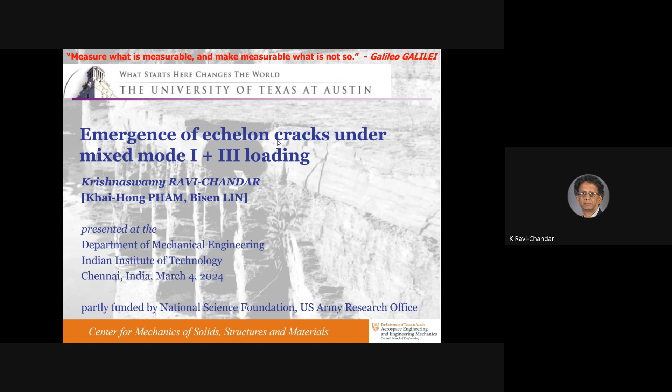The motivating problem for me was something not from engineering, but from geosciences. This is a rock formation in upstate New York State, near Cornell University. It's a huge piece of rock that broke apart, and one side drifted away, and what you're seeing is what is left on the other side. It was an original crack, a parent crack, this smooth surface, a vertical object, which terminated along this line here. Here's a little box for scale, so these are huge objects.

The ground motion is such that this crack is under compression and shear, shearing parallel to the walls of the crack, meaning movement in this direction, and movement into each other giving compression. As a result, from the original crack front, the crack starts to grow into the uncracked portion, but it forms a pattern as it goes, of steps or ridges or echelons. This is the problem of interest: when and how do these cracks form? Can the traditional techniques of fracture mechanics allow us to calculate or predict that this is what should happen?

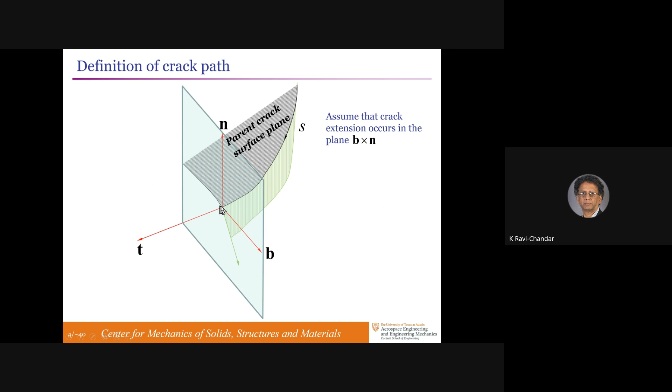So at every point, we subject it to a combination of K1, K2, K3, with a superscript infinity to indicate these are under opening, in-plane shearing, and out-of-plane shearing loading. What is the criterion for growth of these cracks?

Mode 1 is the one that's been considered the most. If you look in the fracture literature, probably 95+% of the papers deal with mode 1 fracture, because that's the commercially important fracture mode that destroys structures and we need to be aware of. So I won't talk about that at all, because it's very well understood.

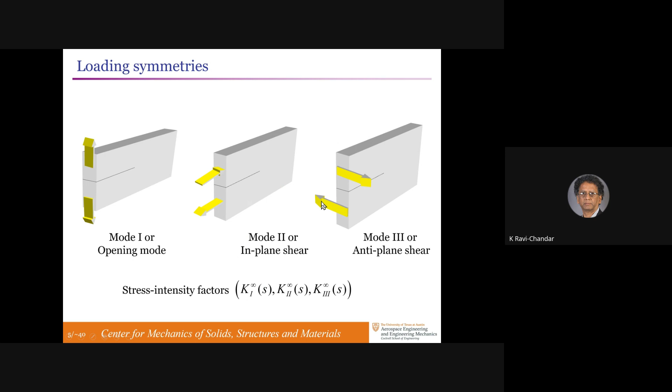So the mode 2 crack in the NB plane looks like this. Here's the parent crack surface, loaded under some combination of K1 and K2 in the far field. The question is, what is the angle at which the crack would grow, and what dictates the load level at which it would grow?

This is obtained using the maximum energy release rate criterion. The crack finds the angle gamma along which the energy released is largest, and therefore it's easiest to crack along there. I'm assuming it's an isotropic material, so fracture toughness doesn't change with orientation.

The maximum of the energy release rate over all angles gamma must equal the fracture energy of the material. You can get an explicit formula for the maximum energy release rate in terms of the stress intensities experienced by the kinked crack, through a calculation demonstrated by Amestoy and Leblond—the local value of the stress intensity factor, local to the kinked crack, in terms of the global values of the stress intensities, as some function of the angle gamma.

So you can do this calculation, find the angle gamma at which maximum energy release occurs, and pose the fracture criteria. There are other possible criteria: maximum hoop stress, which is just a stress calculation—find sigma theta theta as a function of angle; whatever angle theta gives you the maximum, that's the angle in which the crack would grow. The last criterion is the principle of local symmetry.

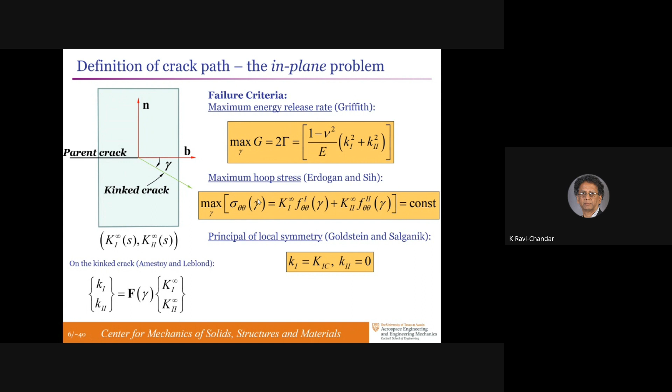Mode 3, on the other hand, is a more interesting, challenging problem. Same picture, I have the parent crack in the NB plane, and I want to know at what angle gamma will it kink. Now the loading is no longer in plane, it's out of plane, mode 3. So the applied load could be K1, K2, K3 super infinity. That means there's a locally perturbed value of K1, K2, K3, which depends on some geometric factor that depends on the angle gamma.

Now, the question that is yet to be answered satisfactorily is what's the extension of the principle of local symmetry for 3D problems, that the crack will find the path along which there's maximum tension or minimum shear. People have interpreted this as saying K2 equal to 0 - local mode 2 is 0, but nothing about mode 3, local mode 3. But the mode 3 contributes to energy release calculation. So the same criterion, mode 2 stress intensity is 0, the remaining energy release rate must be equal to the fracture toughness of the material, and that should give you the criterion for the angle gamma.

But it turns out that if you do this calculation, it says gamma C should be 0, that the crack must grow straight along the B direction. And that's not satisfactory for two reasons. One, it doesn't make intuitive sense that you shear something and it goes along the shear plane when the material is weak in tension. And two, experimental observations contradict it - the crack never grows along gamma equal to 0.

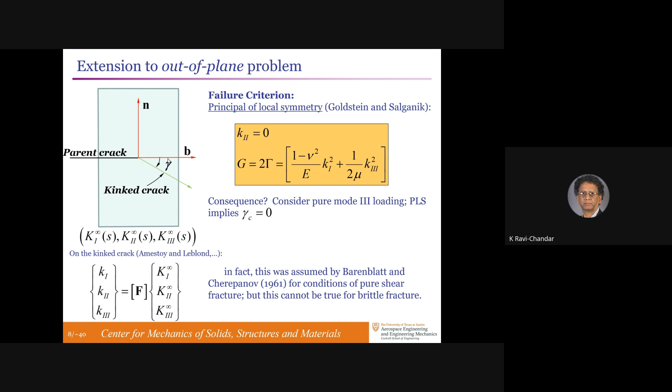In fact, Sommer and Knauss did experiments some 50 years ago. Knauss did a pure mode 3 experiment - you cut a crack into a long, thin sheet and shear it, just like the picture of the rock formation that I showed in the very beginning. The crack is under mode 3 completely, and it spawns daughter cracks. Instead of the parent crack moving continuously out, it pops out - it's independent fractures nucleated at some separation, yet to be determined what controls that.

So basically, this is what happens. The parent crack is shaded gray. The daughter cracks that spawn out from that are those angled Pac-Man shaped objects.

Sommer did an even more interesting experiment. It was a very dominantly mode 1 experiment with an internal crack under pressure in a cylinder - a cylindrical specimen with an internal crack with pressure in there. It grows radially out, but then he superposed a torque on it. That gives you the mode 3 along the crack front of uniform mode 3. And he found that when the mode 3 value reached a critical threshold, daughter cracks spawned out, and you had tilted cracks, or the echelons forming along the entire crack face.

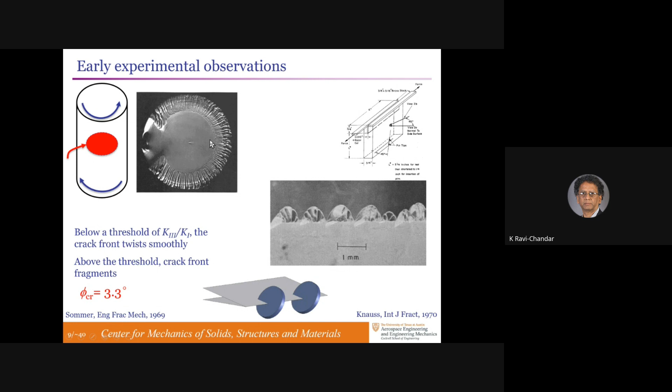So people started thinking about this. What is going on in mode 3? A lot of analysis was based on linear stability analysis. You take a straight crack, perturb it with a sinusoidal oscillation or a helicoidal oscillation, and see if the amplitude of the helicoid or the sinusoid would increase or decrease.

They found a criterion that if the global values of K1 were given, you could calculate the local values of K1, K2, K3, and put this into the energy release criterion to see if the amplitude of the perturbation would grow or decrease. We found a critical transition point that depended on the Poisson's ratio of the material. A bit suspect, but it's okay.

We did some experiments about 15 years ago and found that the instability set in with a different material, different Poisson's ratio, essentially when K3 was negligibly small. So something is not right about this criterion. So we need a new criterion.

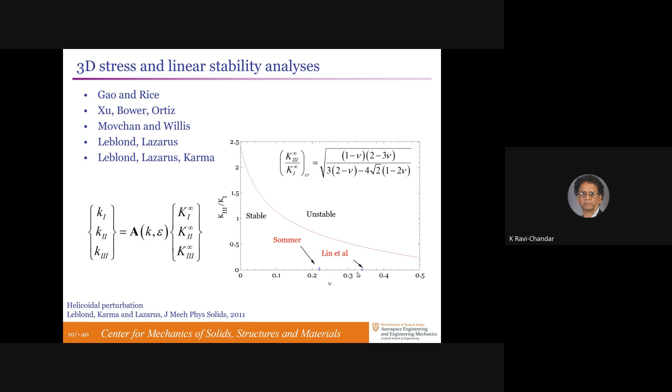So we said, let's do some experiments. The theory doesn't give you the answer. You need to go to experiments to see what else is missing. So we did a number of experiments. The first one was to see, is there a threshold? Never mind what the value is, but is there a threshold at which these things pop up?

So we designed a specimen, a glass specimen, rectangular in shape, under 3-point bending, but with a crack slanted at a particular angle, and the crack doesn't penetrate all the way through. It's a 3-dimensionally shaped crack. You can see it penetrates the surface on the back side there, it's a circular arc and penetrates again over here, on the opposite face.

This was to get different mixities of K3 to K1 on the two sides. And we were able to calculate the stress intensity factor very precisely for the 3-dimensional problem using a boundary integral technique.

The idea was the following: if you slice it in that plane and show the cracked object, this is the cracked part, that's the crack front, and this is all uncracked. It's under a combination of mode 1, 2, and 3.

Can you see those lines? Just barely. Mode 1 is about that line. This point corresponds to that little box here. At this location, the mode 1 stress intensity factor is the largest, so you'd expect the crack to start there. On the far side, it won't, because the mode 1 stress intensity will be compressive, so it won't start there.

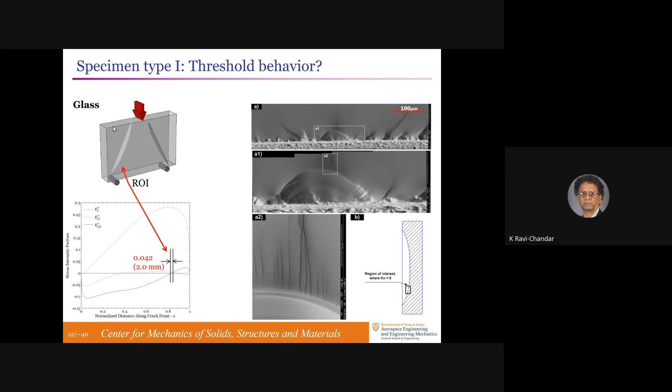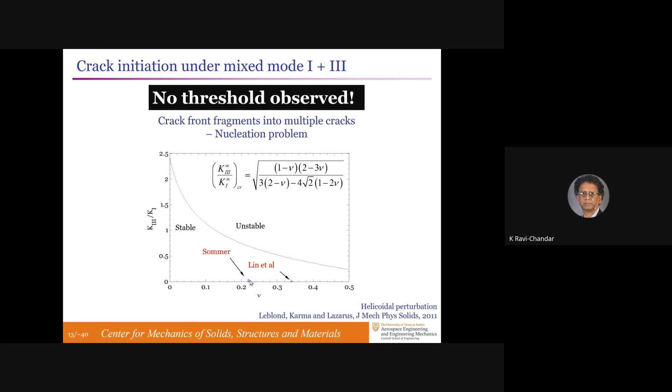So there's no threshold. This is where our results sit, and we have some results over here as well. As soon as you apply a small magnitude of mode 3, the crack starts to flip. So we need a new criterion.

So here's the leap of faith. We made a different extension of the principle of local symmetry. Instead of insisting that only the mode 2 stress intensity on the tilted crack is zero, you say the crack is not capable of shearing at all.

So on the new crack surface, you should have the mode 2 and mode 3 stress intensity factors all equal to zero, and you only have a mode 1 stress intensity factor that must reach the fracture energy toughness of the material. This is very easy to impose. The angle at which the crack would tilt based on this is calculated by this simple formula for plane strain.

That means the crack should do that. The parent crack is in gray. The daughter crack will be the shaded orange color. But this is a criterion that's not possible to impose locally everywhere.

It doesn't have translational invariance. If I move to the right, it'll violate it. So basically what it's saying is if I move to the left of this point, the crack should go up. If I move to the right of that point, the crack should go down, from the perspective of the B vector.

But if I now move a little bit to the right or left, I can't enforce the same thing unless the crack fragments itself, which means it can fragment further. And there's no clear criterion for what sets the spacing for this fragmentation to occur.

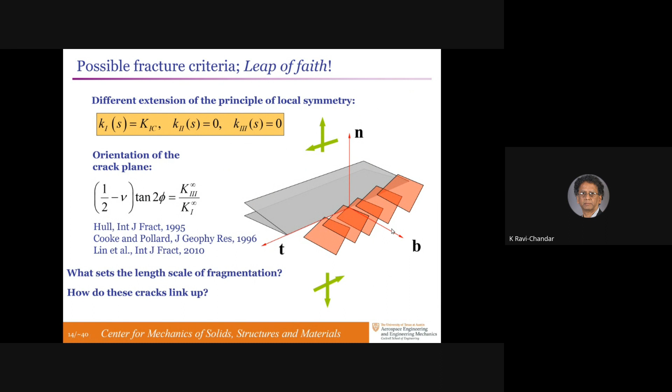First, about how the daughter cracks could link up. If you look from the negative B direction at a slice in the NT plane, you'll see these cracks. They're separated from each other, but the ligament between them is not broken. So you just have these cracks popping up that are disconnected from each other, connected only at the back of the parent crack, with no continuous path to a fracture surface.

Eventually, when these so-called A type cracks slanting to this side start moving, this ligament between them, depending on how wide they are, creates local tension, and they may do a handshake like this. This crack curves and comes and meets this one; this crack curves and comes and meets this one. If they're close enough together, that's how they meet up.

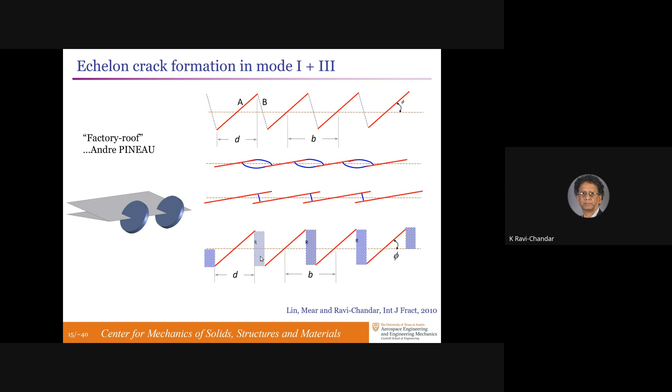In some cases, they just break as a brittle crack perpendicular to the parent, to the daughter cracks. For us, all we need to know is that when these parent cracks spawn daughter cracks, they're not connected, and there's some energy stored in this region that needs to be accounted for if you're trying to look for a criterion for crack growth, where only partial crack growth is observed.

So we redesigned the specimen to have stable crack growth over multiple distances in order to see how these cracks interact with each other. We took the same specimen and inverted the three-point bend configuration. Now these cracks are under predominant compression and shear.

The compression will prevent the cracks from running away, while the shear will make them grow. So we could have cracks that pop and stop at some point, allowing us to look at the geometry of that. I'm only going to show you pictures of what the eventual outcome is.

The parent crack is in the background. This is the width of the parent crack. These were cut with a saw, so they have a certain dimension to them, on the order of 200 microns or so. They pop these daughter cracks—these are the daughter cracks.

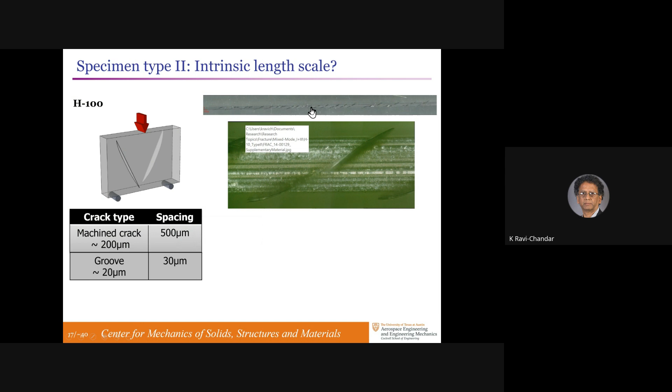So it's whatever the length scale of the crack front is that dictates the spacing, because it's an elastic unloading over some length when the first crack pops. There's no intrinsic length scale—the scale is governed by the scale of whatever defect triggers these daughter cracks.

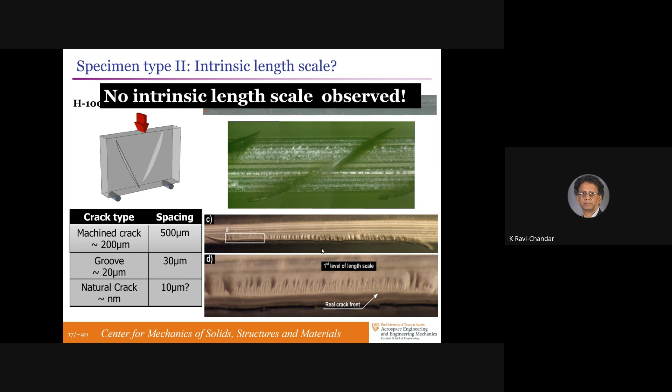The next thing that happens is that the daughter cracks grow, but they shield one another from growing, and they lead to what is called coarsening.

Goldstein did some experiments in the 2000s, I think, where he took a specimen, which is where we got our designs for the threshold determination. There are cracks on two sides, asymmetric, either tilted or straight, under 3-point bending. So they have this mode 1+3 loading, and they spawn daughter cracks.

Here's this cartoon of what the daughter cracks look like. The background parent crack is along that line. The daughter cracks are tilted, and there's a spacing between them.

He did these experiments in Gruyere cheese so that it's easier to slice them and see what the daughter crack geometry looks like. At state A, when the cracks had just started from the parent crack, there was a spacing of those cracks that you can see here.

When you allow them to grow by a factor of 10, I think, in length, you see the same thing: the number of daughter cracks is smaller and the distance is greater. So these cracks that started don't make it all the way through as you progress.

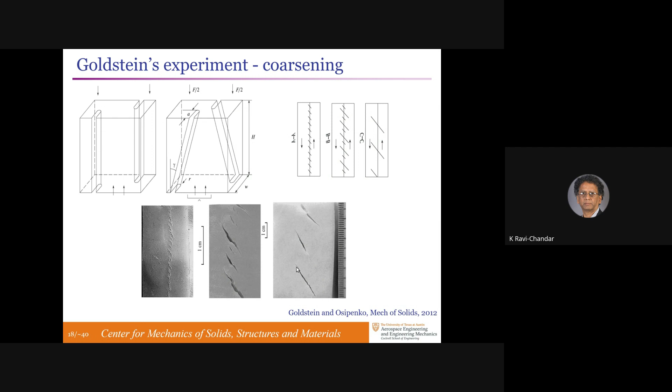We found the same thing in our experiments in a different material—this is now a brittle polyester. Those are the daughter cracks. The parent crack is over here.

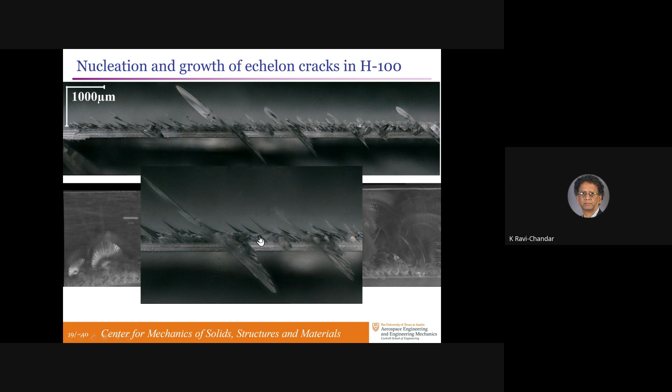They're tilted at an angle of 45 degrees for the mode 3 loading, and you can see many families of daughter cracks. That's the third family, that's the second family, there's the first family that's even smaller. So there's a coarsening effect of these cracks as they grow.

It's easy to understand the coarsening with a very simple simulation. Suppose there's a system of daughter cracks, periodically spaced, subjected to a mode 1+3 loading in the far field. They create a stress intensity along the curved crack front that allows them to grow.

That stress intensity factor, mode 1, is given by these lines. Ignore these two from the endpoints, which have edge effects we didn't take care of. If you suddenly allow one of these cracks to expand and redo the calculation, all of the cracks experience nearly the same stress intensity when they're uniform.

If one takes a burst and moves forward, that stress intensity is shown by the red line—it increases. The two nearest neighbors decrease their stress intensity factors because they're shielded. The next nearest neighbor, this one and that one, don't see any effect. They don't get shielded. So there's a clear period-doubling kind of instability here.

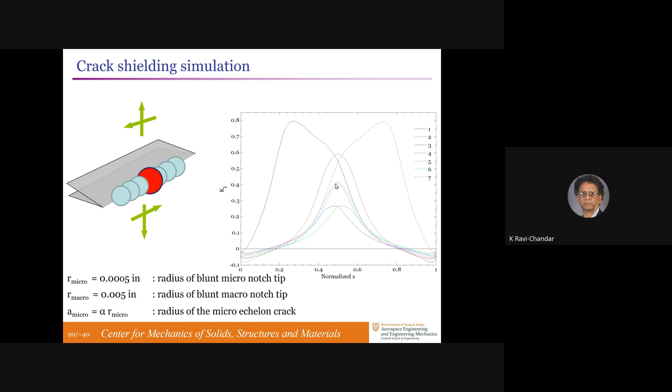If by any accident one crack pops, it will shield the nearest neighbors, and the next nearest neighbor can grow. Take that to its conclusion and it'll always period double, and every second crack will stop—that's what's going on here. Fairly easy to understand.

Finally, how do they link up and grow? For this, we have to create another experiment. This was done on a hydrogel, gelatin-based, the dessert that you make. We made specimens out of gelatin and put them in mixed mode loading by pulling it in uniaxial tension, but put a sharp angled crack, part-through crack at an angle, and observed what happens.

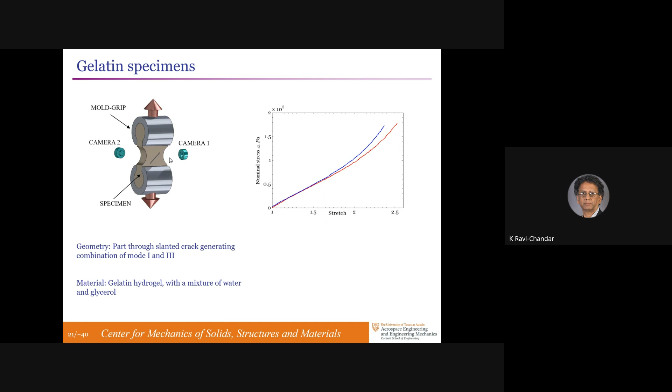This is a crack that was scribed into it and then applied mode 1+3. It created daughter cracks, and we've already established that daughter crack system. We continue to load it to see the further progression of these cracks—how they basically link up and join.

So the crack is at a slant to the geometry of the loading, but we're looking at it at a projection.

So you could see the daughter cracks starting to grow. And if you pay attention to some of them, they'll fall off. The other ones keep going. We'll play it again. So somewhere here, you'll be able to see the...

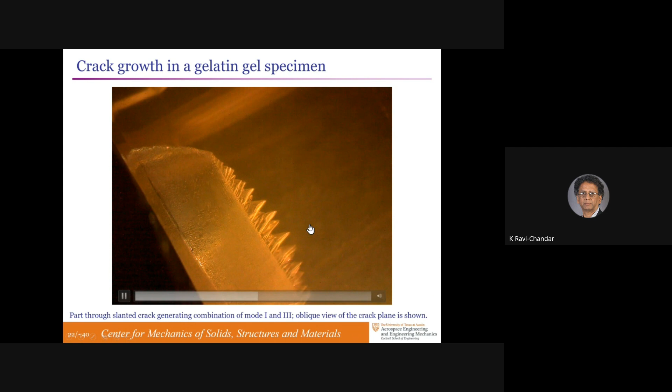This crack will fall off. It slows down, and there are others that slow down too. But these are unconnected cracks. They're all at a slanted angle, and they keep going. Some of them drop off, but the other ones keep going unconnected. And eventually, something connects them up from the back.

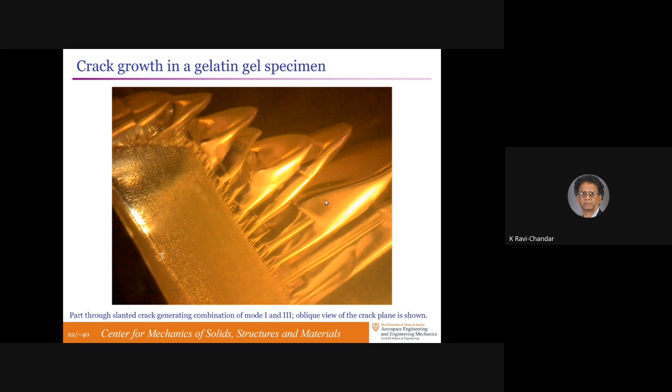And you're not able to see that here, so I have to show you a cartoon of what I think is going on. So that's the parent crack. It spawns daughter cracks. The daughter cracks grow. They shield, and some of them grow more than the others.

But now what happens is you're still subjecting them to this load, but the parent cracks will experience a larger mode 1 loading because otherwise there's no further deformation possible. The parent cracks lock them in and they would stop it. So they would advance and the entire system will keep moving to a steady state. And this is how the pattern survives the coarsening and eventually.

Yeah, right. It has a jet lag, or you? It has a lag. I don't know if it's a jet lag.

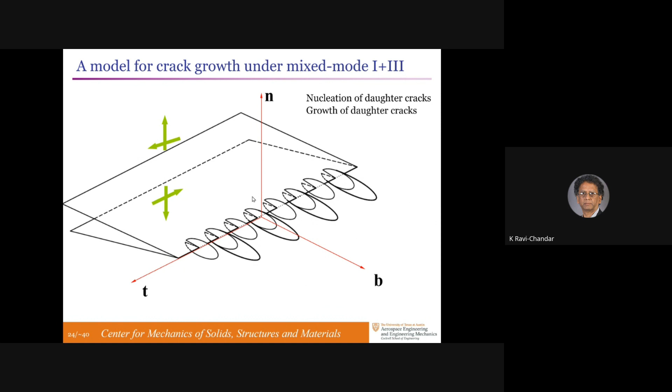So we think that it's trying to establish a steady state by this coarsening process and cutting off from the back. And then you could see that this progression could sever a large surface into two pieces. So that's what's going on here.

Now you can see there's a spacing of the daughter cracks, and they're all tilted. You can't see that from this picture, but each one is a tilted crack at an angle. And as they grow forward from the main parent crack, some of them get dropped off, and there's a coarsening, and you can see that at this point, one of the cracks, these two merge and become one crack. These three have merged and become one crack, and so on. So the shielding is non-uniform because the material is non-homogeneous and there are local defects.

So that's what we think is going on. So the question is, can you now simulate this thing? And we're going to do phase field methods to see how we can simulate this.

I'm not going to spend too much time on this phase field method, just give an outline of it. So the idea behind the phase field method is to write the Lagrangian for the system, consisting of kinetic and potential energies, and include in it the fracture energy to enforce Griffith. The idea is that this is over the set of points that form the crack, and that is what makes it difficult to handle. You cannot do this for arbitrarily unspecified crack path. The Euler-Lagrange equations, I don't even know what they would look like to write.

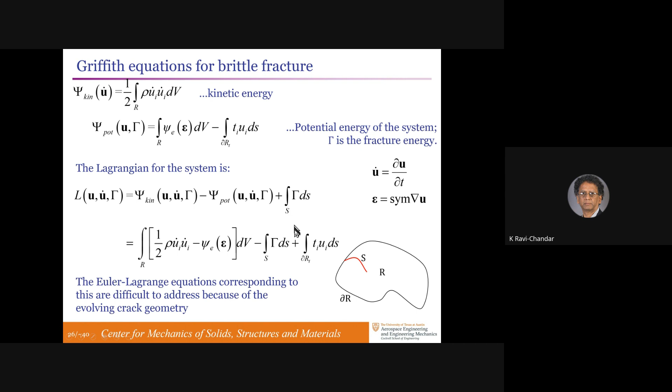But the idea behind the phase field approximation is threefold. First, the surface integral here is approximated by a volume integral. So instead of the integral of the fracture energy over the fracture surface, you do the integral of the fracture energy over a spread out smeared volume, where the volume is dictated by some intrinsic scale of length L naught to be decided, and you introduce a parameter C, which will degrade this material from intact to a damaged material over some magnitude of the loading history, depending on what kind of formulation you do for the fracture energy penalty.

This brings in intrinsic length scale dependence, so they've introduced a gradient penalty term to penalize sharp gradients. And finally, to model the loss of material stiffness, you degrade the strain energy in the material based on some assumption on how the damage progresses as well.

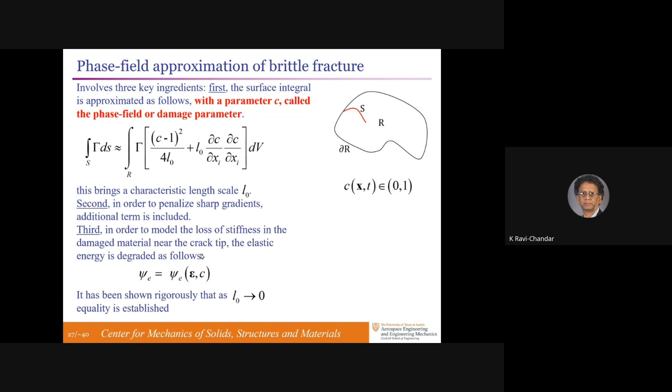Now, there are proofs that this will converge to Griffith fracture if the length scale L naught tends to zero, and there are fix-ups for fixing the fracture energy when L naught is not zero. I won't go through all of that, but the basic idea is you've replaced that surface integral by this volume integral term, and now you can write the Euler-Lagrange equations for this easily. And this is the divergence of the stress equal to the inertial term, where we have defined this thing as a new stress, damage-induced stress.

Psi e depends not just on the strain, but also on the damage parameter C.

So you get two equations: one for equilibrium of the mechanical forces, and the other for the evolution of the phase field parameter.

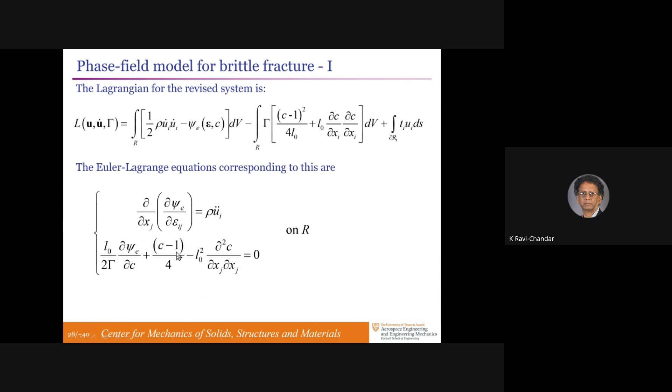I'm not going to go through this in detail because I'm jet lagged, but the details are a little tricky. The basic idea is you take this strain energy to be the undamaged strain energy multiplied by some function of the damage parameter C, and that gives you the damaged elastic property as well as the evolution of the damage function itself.

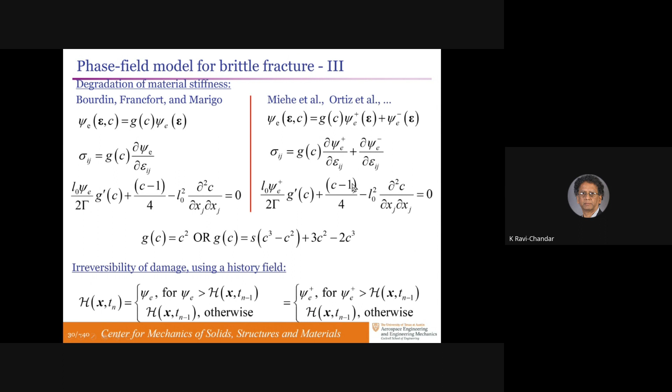You can do the one-dimensional problem fairly easily, I'm skipping details again. Basically, depending on what your damage function is, the local stress-strain behavior with the phase field is linear up to some point, starts damaging, reaches peak stress, and then damage continues until the material separates. So you've converted the problem of fracture mechanics into one of elasticity or elastic calculation with this model.

Crucial to it is that there's an intrinsic length scale that's been brought into it, and this length scale must be extremely small in order to capture the fracture process faithfully.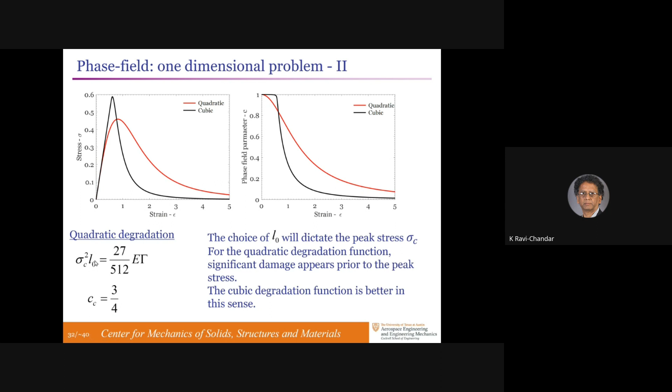So it's a very unsatisfactory description of the phase field method, but we said let's implement this and see what it does for the problem of mode 1+3 fracture.

We created a very fine discretization of the crack tip regions to see how a mode 1+3 loaded crack will grow. We simulated only a small domain near the crack tip, applied K-field boundary conditions, meaning displacements based on the K1, K3 field, at about 10,000 length scales L-naught away from the crack tip, to give you an idea of how far we had to go.

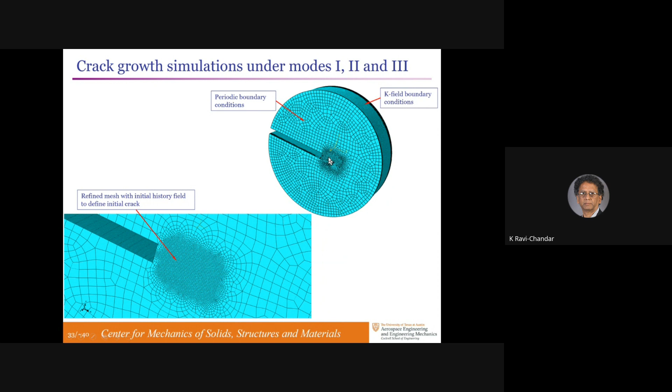If you run this with modes 1, 2, and 3, you get the following: for mode 1 loading, the phase field method predicts the crack should grow straight, which makes sense. For mode 2 loading, it kinks and the crack grows at an angle of about 70 degrees, consistent with continuum predictions. So the phase field method seems adequate for these cases.

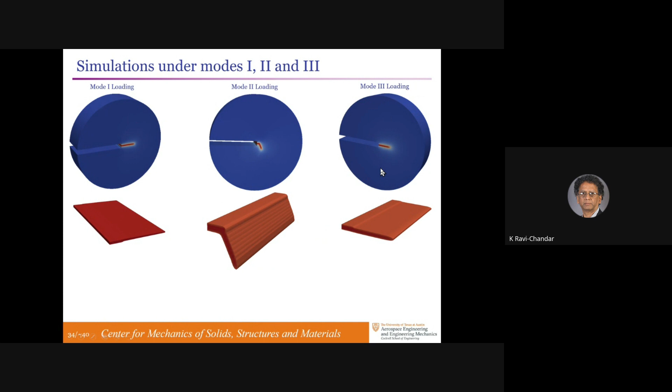For mixed mode, the unresolved issue between which technique is good still remains, because this is within the same error bands. But for pure mode 3 loading, the crack grows straight, because that's the only path along which it can minimize the energy. So it goes straight. Well, we know that's not true.

So what do we do? We decided to implement the idea that defects are the key. So we introduced defects into our mesh. How? You pick a cylindrical volume along the crack front and randomly identify about 0.6% of the mesh points or elements, and give them damage, meaning they're completely damaged, C equal to 0. The rest remain intact. So this is an initial defect field prescribed over this volume.

We let them be subjected to the mode 3 loading. Remember, if that defect system was not there, the crack would grow straight from the parent crack. I don't show the parent crack here — it extends behind in that direction. This is the thickness direction of the specimen, and these defect elements are centered along the crack line.

So, pure mode 3. The cracks become visible when new elements get damaged, not the old elements. So you can see the role of defects — they deflect the cracks from their original path along the line of symmetry.

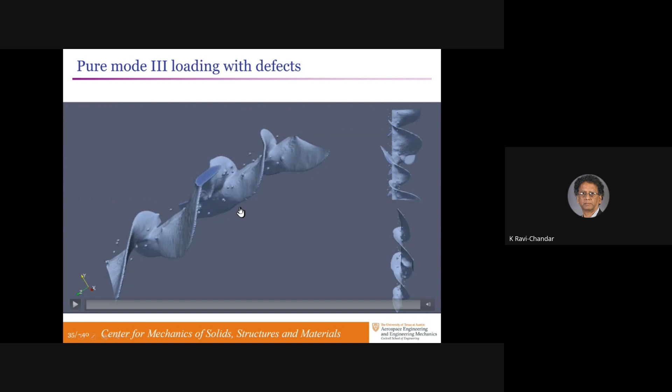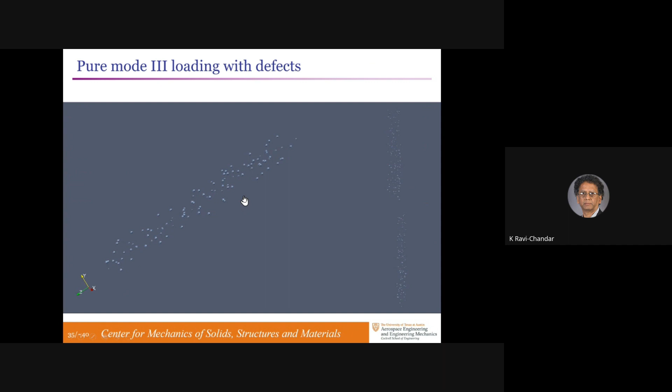So that was under pure mode 3. What happens at the point where the linear stability analysis indicates a transition? We wanted to go well below that and see if these cracks are stable. This is at a K3 to K1 ratio of 0.3. It's below the line where the transition to unstable perturbation analysis results.

Same idea: many defects in the field, and then they start perturbing the crack. When they get out of that, they've already formed a pattern of slanted cracks. The slant angle now is smaller, you can see the angles are smaller, but there is clear evidence that they've established their slant depending on the ratio of K3 to K1.

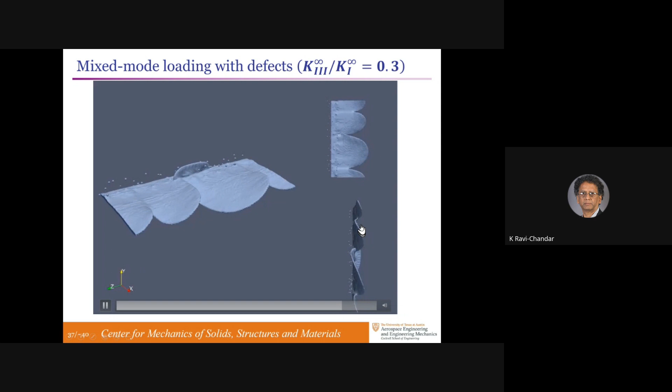Again, they've run into the end of the simulation domain. So now let's do multiple cracks and see how they interact with each other. The parent crack is behind, and you can see the intersection of the daughter crack with the parent crack. We put in a periodic array of daughter cracks to see how they would evolve and link up with each other. Now we don't have any more defects in here because the parent cracks are already—the daughter cracks have already been spawned. We don't need defects.

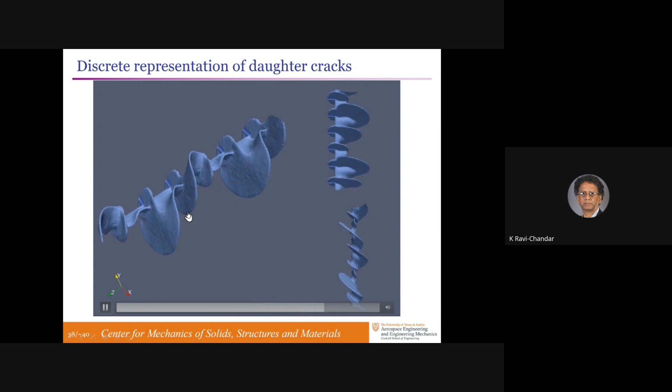So this is at a particular tilt angle corresponding to whatever the ratio of K3 to K1 needs to be for that. The parent cracks start linking up, they grow. The daughter cracks grow and shield each other. Here is the coarsening—this one and this one grew, the ones between them stopped.

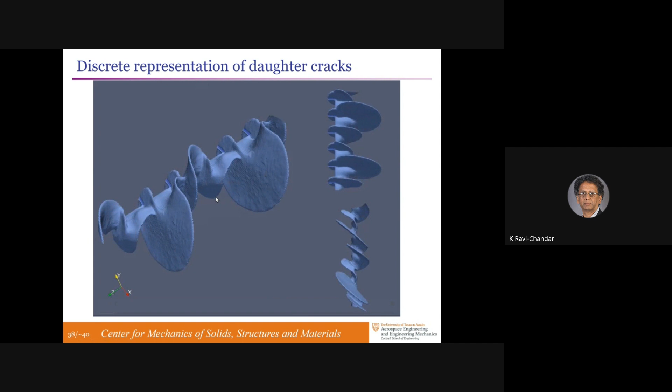And so we've been able to reproduce fairly every feature of the experiment that we were able to see with the phase field method. The only thing is you need defects to start triggering this thing. We don't have enough computational capability to do this on a scale that is structural unless the phase field method gets refined enough to be able to coarsen that length scale L0. All right, with that, let me stop.

What we've done is looked at the problem of interaction of mode 3 with mode 1 that spawns daughter cracks, or fragmentation of the original crack front, and dealt with some issues related to nucleation and growth of these things. We've shown that phase field methods can reproduce some of the features, but there's an opportunity for doing rigorous simulations at a larger length scale, reaching larger length scales to be able to do structural problems.

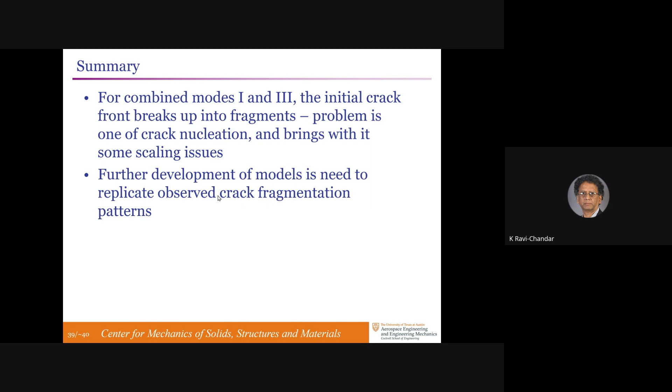If K3 is really low, it should almost... well, let's see if this will work, or I can get out. So this is what I was trying to show. This is for pure mode 3.

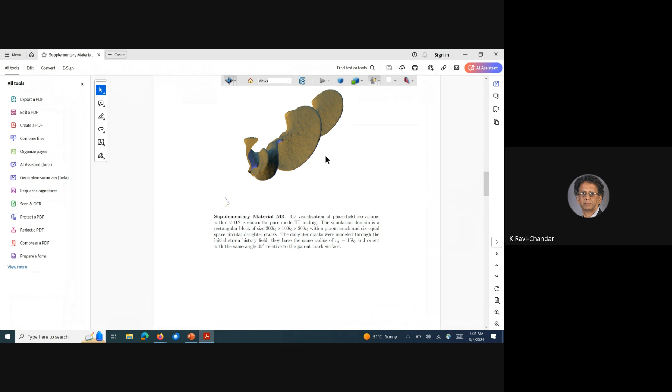That's at 45 degrees. Now if you make K3 below the threshold, you can see the angles are much smaller, but they do fragment and it's visible. This is well below the place where the linear stability analysis says it's stable. So the stability analysis is ignoring something - I don't know what it ignores.

One question from Ravi. Speak up. Oh sorry, I put that in the chat box. Ravi, thank you, very interesting. I missed the first part, so I don't know if this is relevant, but there seem to be similarities with ordinary cleavage fracture, where a cleavage plane in one grain meeting a boundary at a grain boundary has to branch. Very good observation, I should have pointed that out.

There are some very elegant experiments by Ali Argon, where he looks at a cleavage crack in one grain meeting another grain where the cleavage plane is misoriented. As they pass through, they create the same system of echelon cracks in the second grain. It's exactly the same mode 1, mode 3 interaction, because if it's mode 1 in the first grain, along the cleavage planes of the second grain, it's a combination of mode 1 and mode 3.

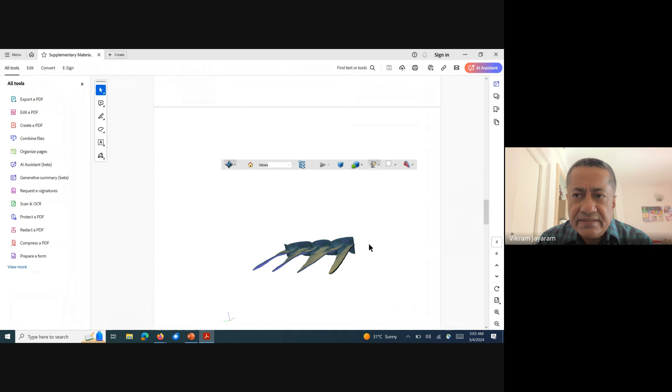So I was going to ask: is there a length scale that dictates the number of daughter cracks that would form? Yeah, I think I mentioned it depends on the size of the parent crack, some measure of the parent crack. In our experiments they were machined grooves, so that set the scale for the daughter crack spacing. In the bicrystal experiment, I think it's something about the number of planes involved in the cleavage process, I would assume. Okay, thank you.

What was the choice behind the experiments you did with gelatin? Why did you choose gelatin, why not something else? Gelatin has a very slow, stable cracking process, and it's very easy to see through, very easy to manufacture. So we picked gelatin. Also, we were working on gelatin for other reasons during that time, so it came in handy.

Our choice of materials is that they should be brittle, they shouldn't have inelastic deformation. So the three materials I showed, glass, Homalite 100 (the thermosetting polyester), and gelatin, all have very small process zones and are basically elastic brittle. Also it can be isotropic, right? Yeah, right. Although in the bicrystal experiment of Argon, they were not isotropic materials - they were two single crystal specimens, so not necessarily isotropic, since each grain has a certain crystallographic orientation. They have to be brittle and elastic - I think those are the two requirements.

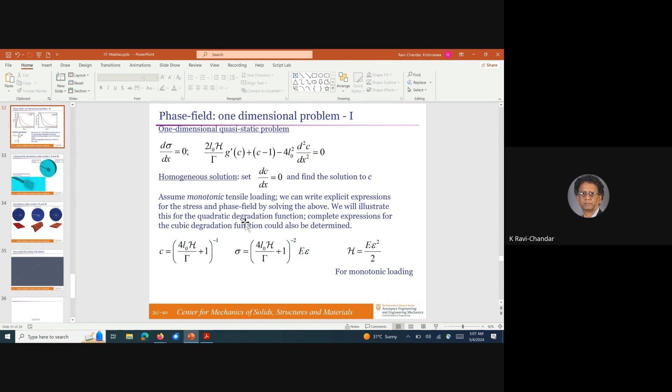Yeah, I see a more regular pattern there. At every position, at some distance away from the parent crack, I can identify a feature. I don't see that there's a fractal dimension to it, but there's this period doubling dimension that is more evident than anything else - as I go farther away, there are fewer cracks that are longer.

And that you can explain by the shielding process - you don't need the idea of fractality for it. What you say makes sense, because otherwise they would look at self-affinity and such.

So, but still, if you do the fractal dimension for this, maybe it will show what is the effect of crack shielding. Perhaps, yeah.

Study similar to this problem - there's also excavation and mining sites, limestone, granite. So I can see similarity, at a larger scale.

Iceberg calving - when it calves and falls into the remaining part of the iceberg, it will have this kind of feature as well. Even mining sites are actually fractured, so you can walk around hills and see this kind of feature in many places. Any rock formation, rocks that fail typically under mode 1+3 will create this pattern at some scale.